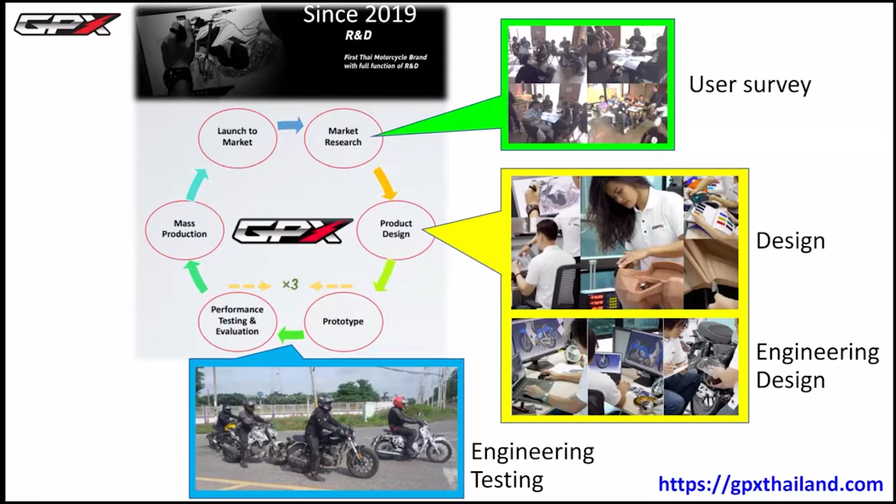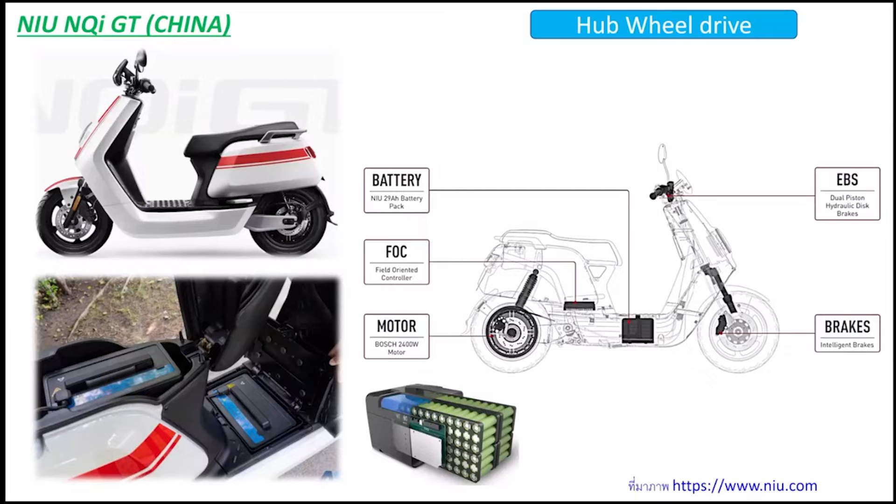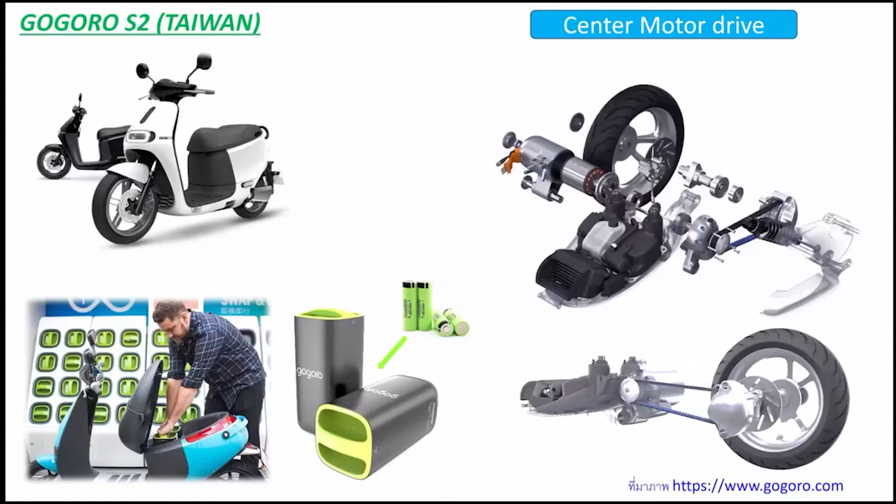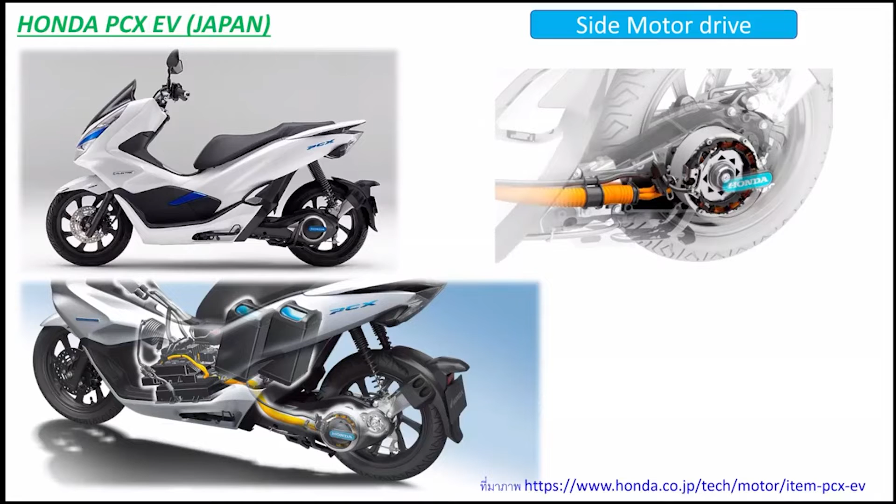The motor controller is in the middle of the body. On this model, you can plug in the wire to charge at home as well. This is a kind of EV in the market.

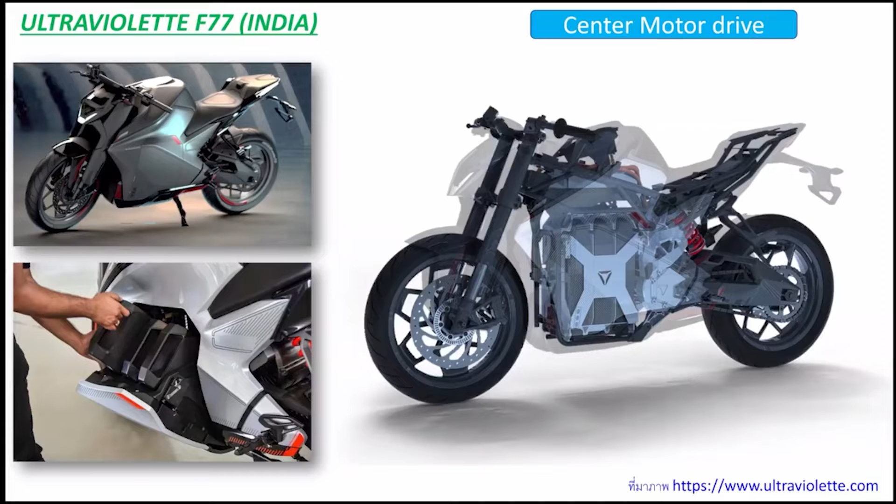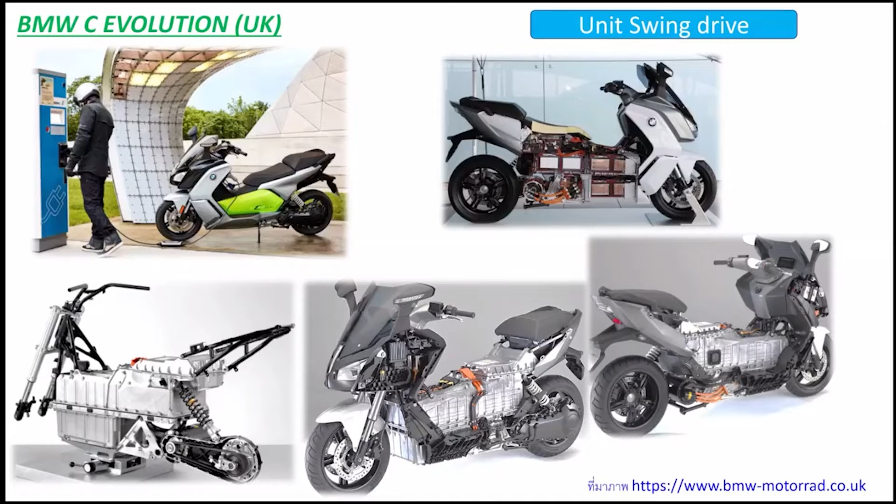This is from the UK. For sure, BMW is the high end of development. You see the battery, controller, and electrical system are integrated technology. But the disadvantage is you cannot place things under the seat. Basically, you can place your stuff like a helmet there, but with this you can't.

So we just want to show you that their feature is different from other models, from other brands. Their motor is unit swing drive. Their motor is combined with the swing arm to hold the back wheel. This is similar to the scooter engine.

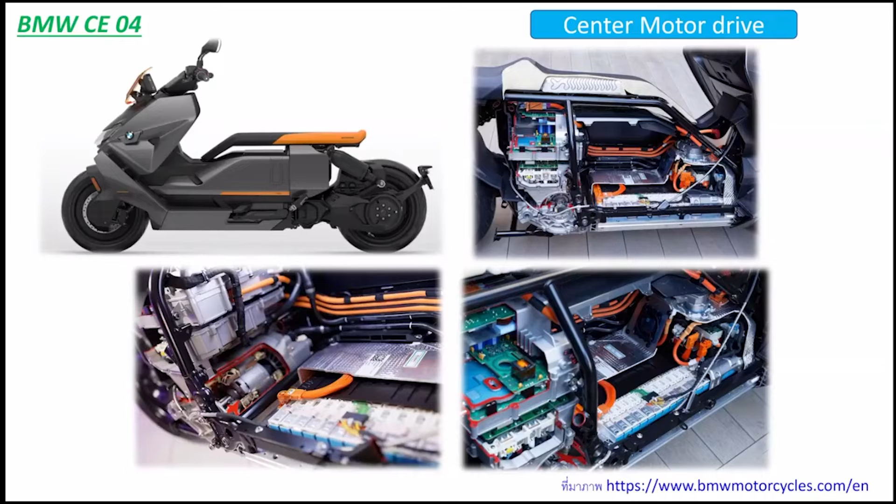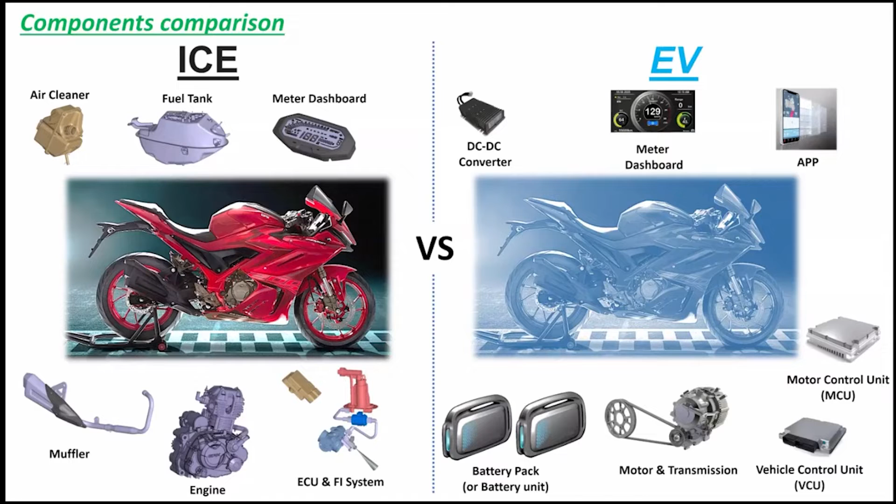The DC-DC converter is what we use to convert the voltage for the electric vehicle, meter dashboard and application. Here are the components for the electric vehicle. Here is the comparison between the ICE and the EV.

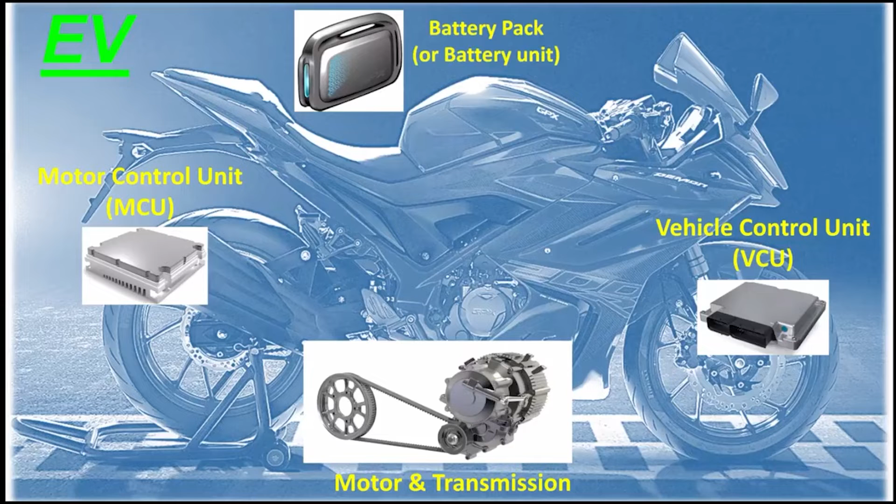Okay, now we move on to talk about electric vehicles. We will talk about each part or each component, for you guys to see the example for development. Okay, so we start with the battery first. In the previous slides, we saw the overall electric motorcycle and the main components for the electric motorcycle. So now we will look into more details on the battery.

At the moment, the batteries in the market come in different types and different shapes. We divide them into 3 types of battery, as you can see on the slide here. The first type is cylindrical cell. It's like a small battery. There are many sizes, like 18650.

So the battery cells are divided into 3 types. We divide them by different size and shapes. The first one is cylindrical cell. The cylindrical cell shape is very similar to the small battery that we use in regular day-to-day life. It's a lithium battery.

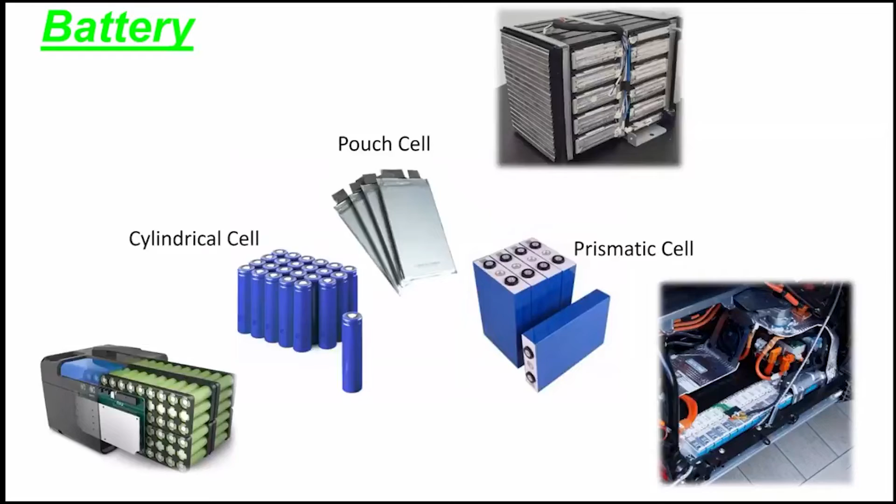Here is the list of battery chemistries. So we look into the ingredients of each battery type. Well, the most important ingredient is lithium. Okay, the different types of battery we normally use: we have lithium cobalt oxide, LCO. We have lithium iron phosphate, which is LFP. We also have lithium manganese oxide. We have lithium nickel cobalt aluminum oxide, lithium nickel manganese cobalt oxide, and lithium titanate.

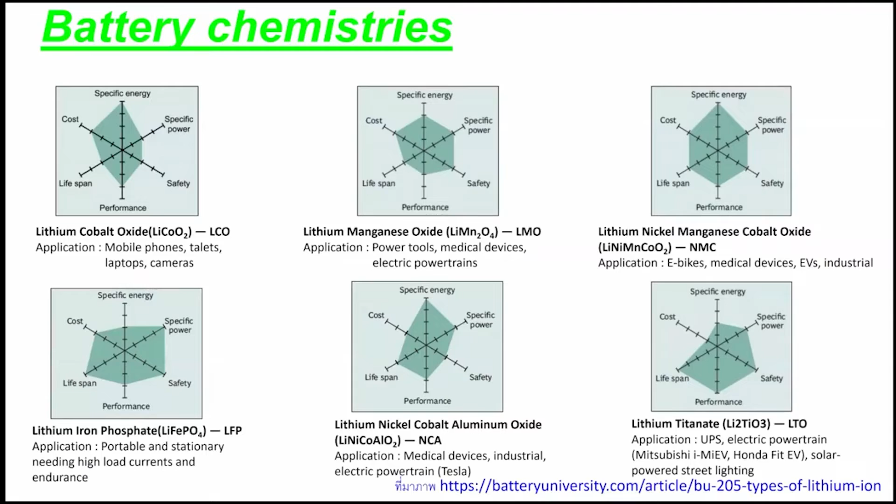Well, there are many more battery chemistries. However, we just picked out 6 main ones that we use at present. Okay, now we move on to the motor. Of course, the motor is the most important part within the EV, electric vehicle. Well, the first one is the IM, which is the induction motor. As you can see in the picture, with the first one, IM, you don't see any blue points around. With the induction motor, there is no magnet at all.

Next, IPMSM, which is the internal permanent magnet synchronous motor. As you can see, the blue area is the magnet. The third one is line start IPMSM, which is the internal permanent magnet synchronous motor with rotor cage. It's a development from the IPMSM. At the moment, this line start IPMSM.

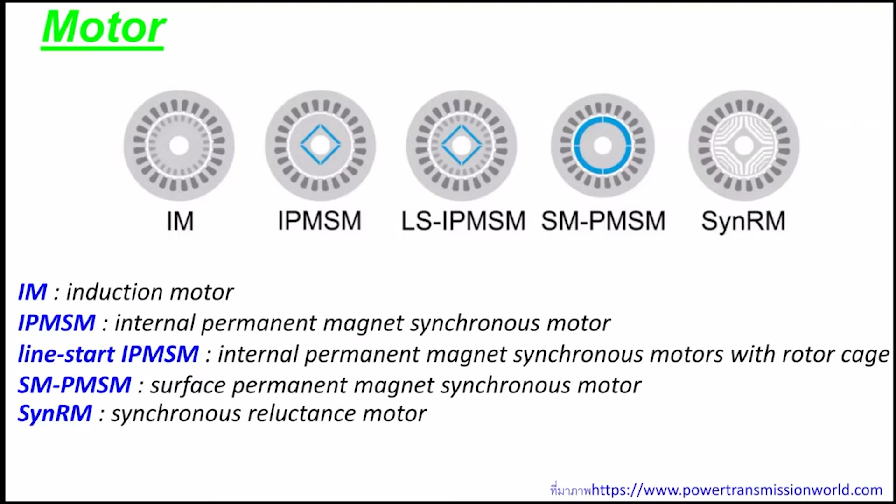Let's look at some examples and pictures of the types. Well, as you can see in the photo, here is the motor that we use with the Honda Accord car. And may I just say, all the pictures here are ones used within cars rather than motorcycles. As you can see in photo D, on the right hand side is the steel containment ring and the aluminum casing.

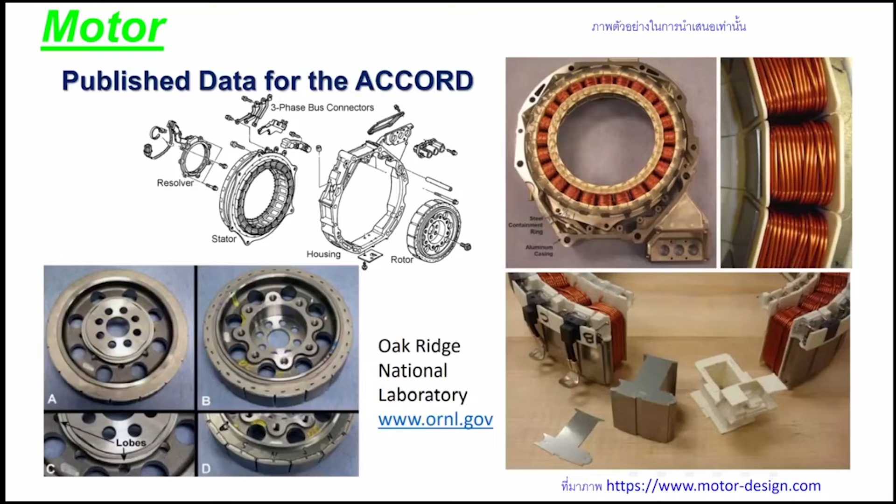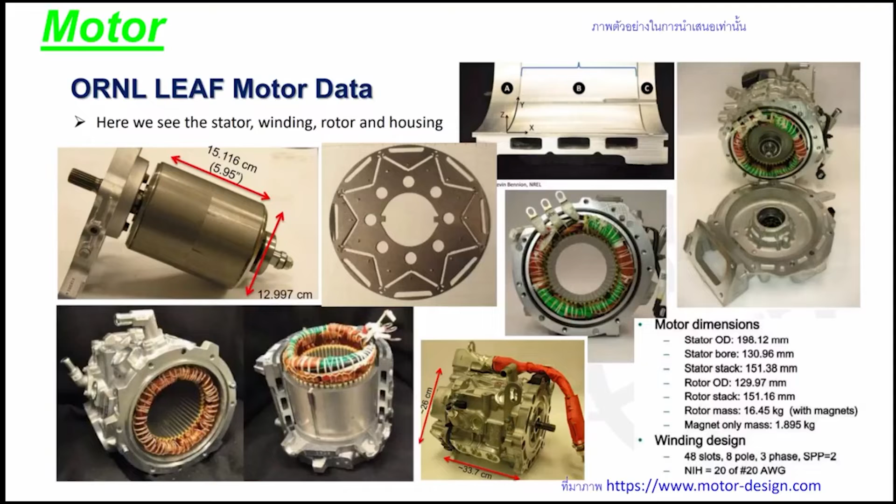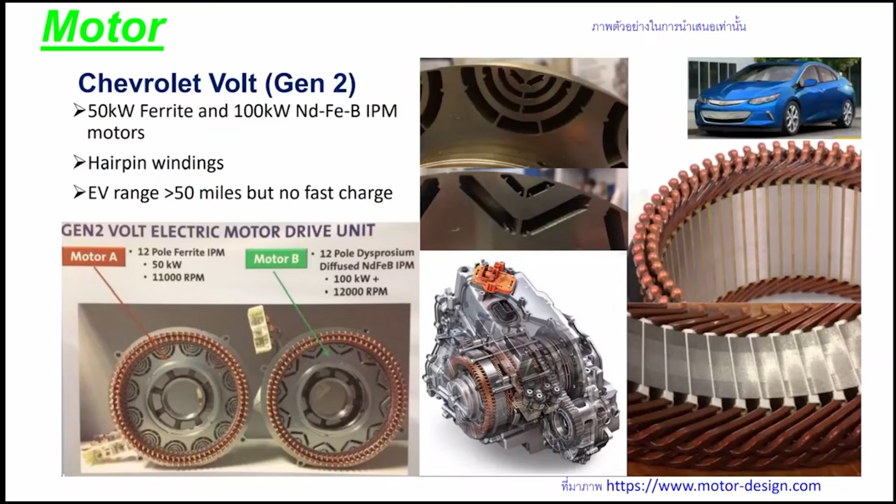There's a comparison between motor A and motor B. You will see that we use ferrite magnet and neodymium, so the power is different. You can see the difference between motor A, 50 kilowatt, and motor B, 100 kilowatt. Of course, the performance will be different as well. Here is another example, the BMW i3. With this model, we use an IPM motor, and we use neodymium and a lithium ion battery.

So take a look in the middle of the pipe; that is how we use the water to release the heat. So that would be the implication and the downside as well. Because of the heat, we need to have good management. So we would like to suggest our teams or the contestants think about this as well. If we have to make a high performance motor, we need to care for the cooling system as well.

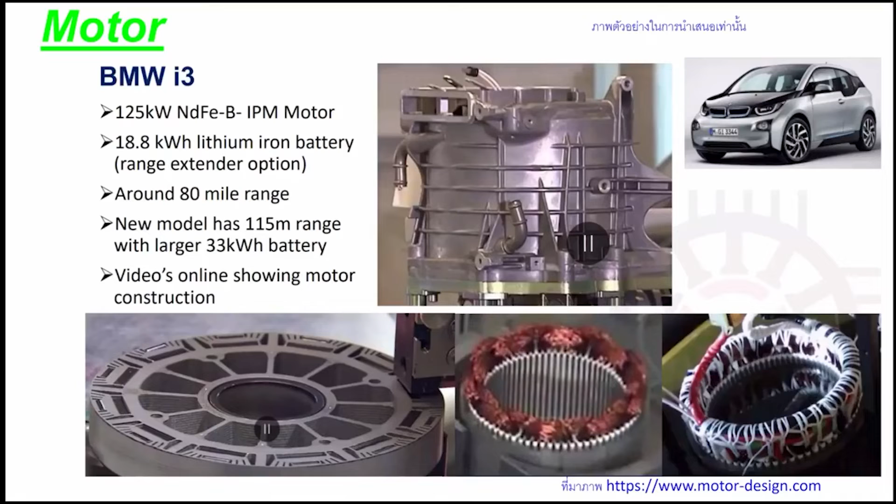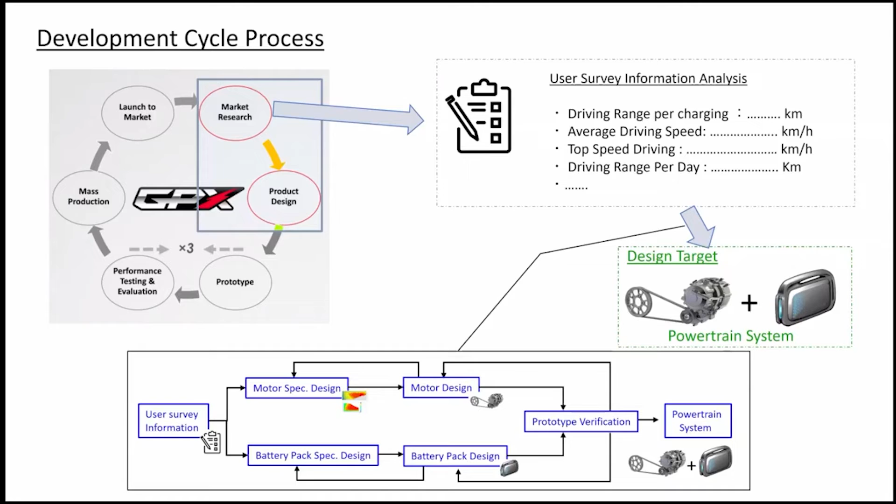So we already learned about batteries and motors in our market nowadays. Now let's take a look at the trends to develop the powertrain system. So briefly, as we said earlier, we did the market research and the product design. After we get the information from the user survey, what do we do next? Briefly, after we got the demand from the user survey, we analyze the information and the type according to the demands. We get the information to design the motor and battery, and we get a powertrain system with a motor and battery that satisfy the market.

The first part, we are talking about the motor specification design. After we have the requirements, what spec do we need? So on the slide first, we have the modeling.

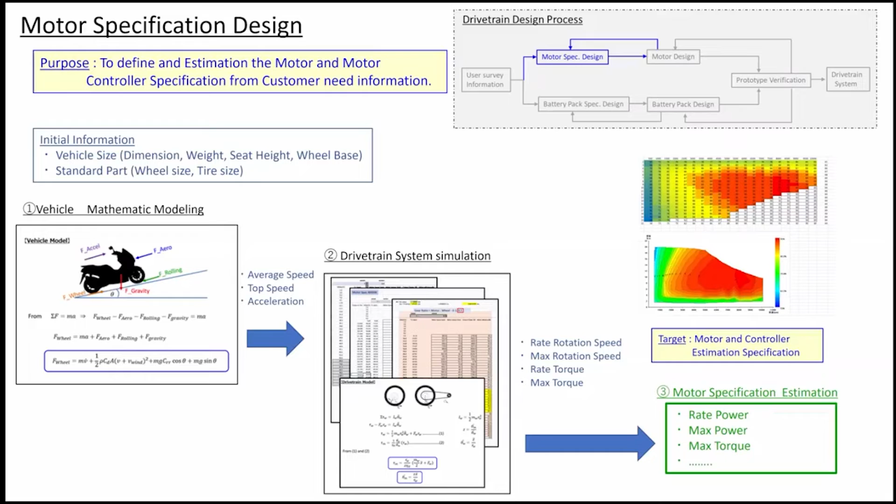So after we get... so we have the drivetrain system simulation. We are talking about the average speed, top speed, and acceleration, and also to satisfy the need of the market. After we get the target, we are coming to the motor design.

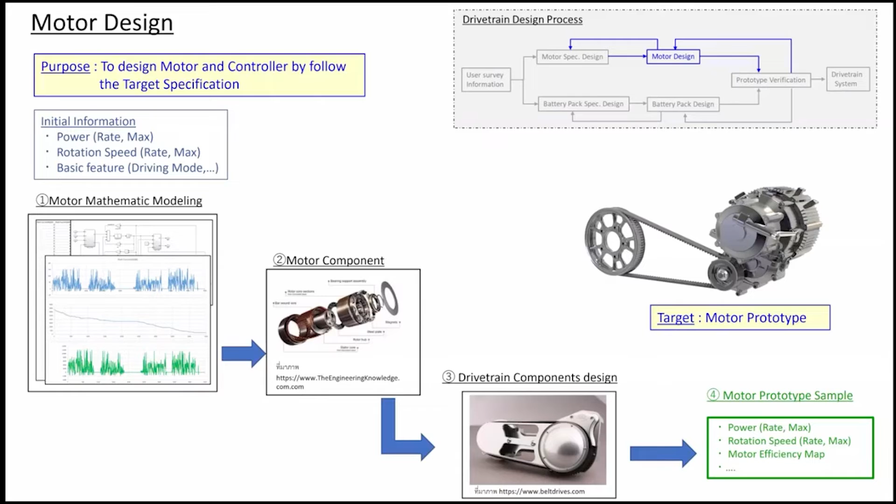So we have to come to... to have the performance we need to talk about the... So after we design the motor, we are coming to the drivetrain design. We're in the drivetrain design process. The last one is the motor prototype, so that we can satisfy the demand of the market.

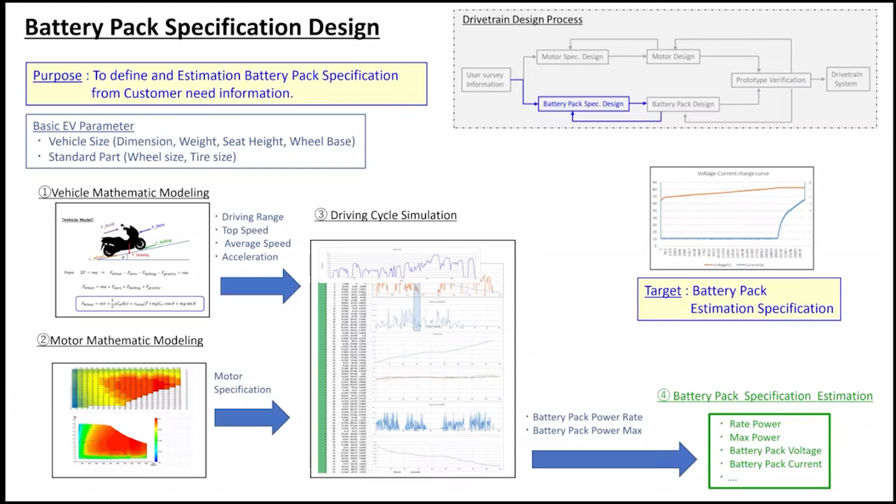We would have this. We will have the battery spec from our information. After we get the motor spec, we are talking about the battery pack design. There are different types of battery cell. We need to choose which one is suitable for our vehicle, what kind of battery is suitable for our application, whether price, safety, energy, and life cycle.

We have to design the battery pack. In this process we would design how many volts we would use. In our market, there are different types, whether 72, 80 or 100 volt. For motorcycles nowadays, it's 2 to 3 types, 48, 60, and 72 volts. There are also 96 volts as well. So we'll design the battery pack. What is the voltage of the battery pack? What are the rated power and peak power?

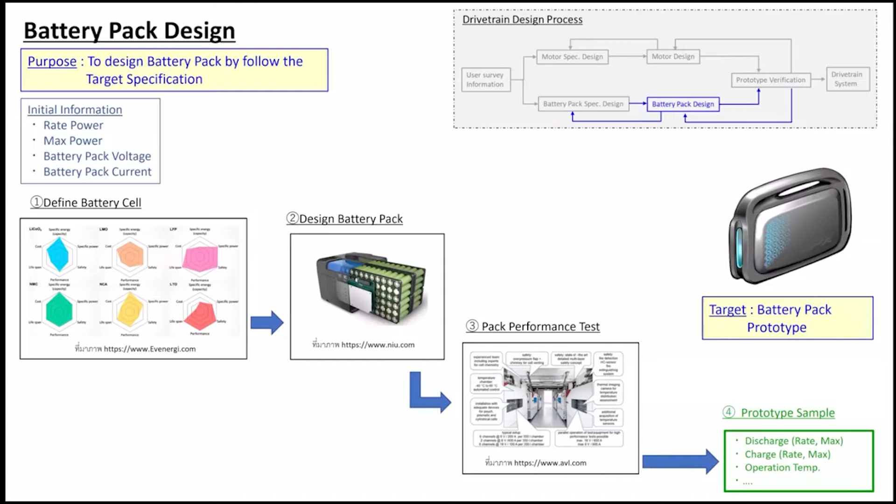After we design the battery pack, you would go to the significant process. So we have to test the performance, the safety, to charge and to discharge the battery. This would make an impact on our vehicles. So we would have the prototype sample as we design according to the demand of our users.

After we got the motor controller, we would develop it as the same unit. We have the power motor and the battery from our prototype process. This part is very important. So we need to test against our expectation. Is it according to our rules, our law in our country?

In the first process, we have a user survey. We need to set our target. What's our drivetrain standard? What's the target? Let's say 100 kilometers per one charge, or what is the average speed? Must be 90 or 150 kilometers per hour. So after...

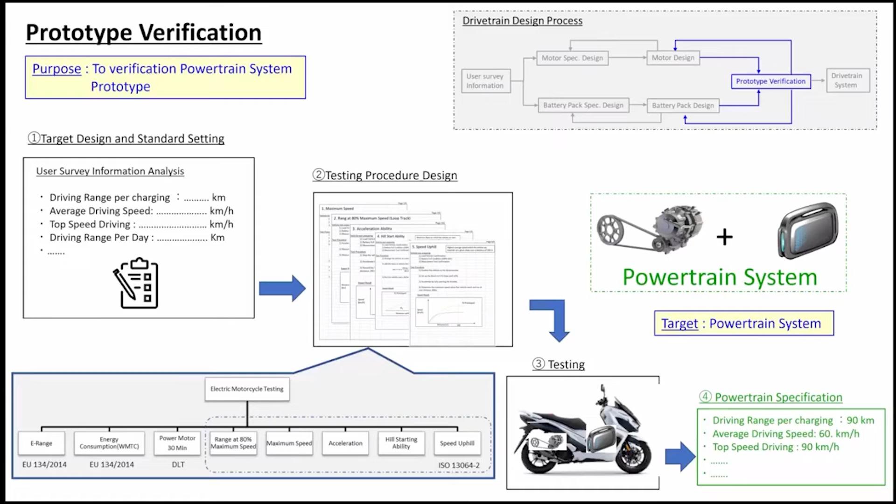So we also need to think about business design so that we could make big sales. We need to think about the law. We need to design to the standard that they already set. So also like braking system, safety system. That's another detail that we might not be able to mention here.

Okay, moving on to the next topic. It will be about the VCU features block diagram. We'll look into the vehicle control unit, which is called the VCU. There are different parts and different components. The VCU is the main controller for the vehicle. Here are the minimum requirements, the base that all electric vehicles should have.

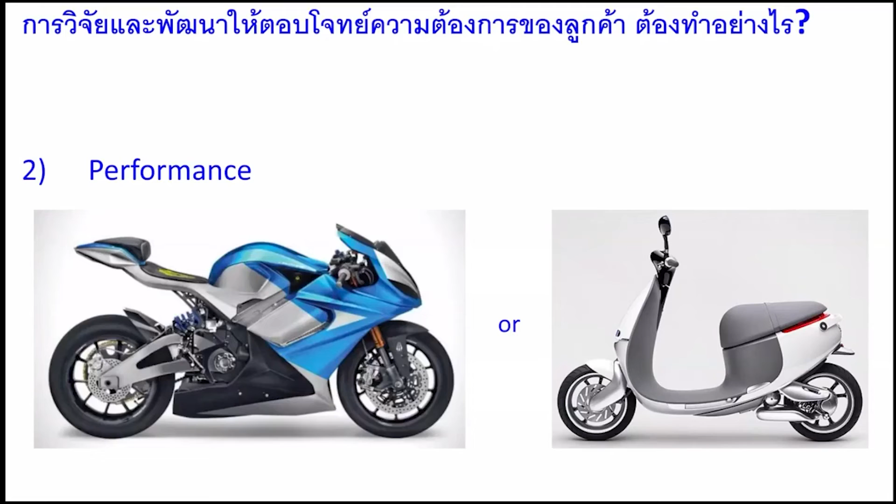Of course, overall, we look into function and feature. With the VCU, of course, if we have more function, more design, this is the key point that we can sell to customers. Of course, there's something to attract the customers. Of course, they will consider the price as well. Of course, Japanese-made motorcycles are the top brand because of the high quality and high performance. And most users pick a Japanese brand.